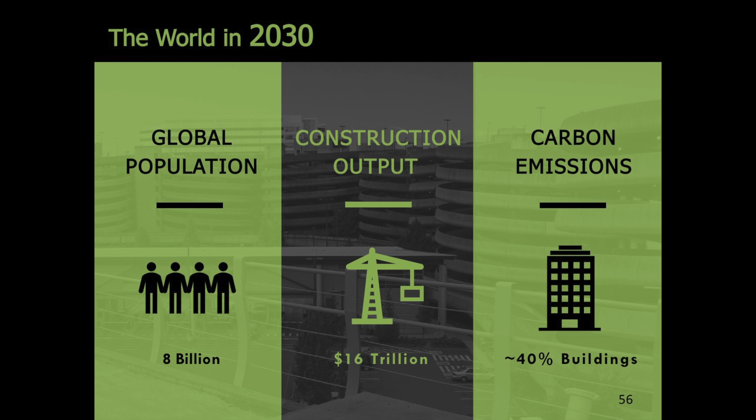By 2030, 60% of 8 billion people will reside in urban centers, requiring $16 trillion in construction output. This construction and operations of buildings will contribute to over 40% of total carbon emissions. We are here tonight to understand how to reduce carbon emissions from new construction by helping decision makers better understand how to account for carbon in their new construction projects.

This slide shows the two types of carbon emissions with the example of a building which is in the middle of the diagram. On the left are emissions associated with the building's operation and maintenance, such as lighting and heating. These are known as operational carbon. On the right are emissions associated with building materials, such as steel and concrete. These are known as embedded carbon.

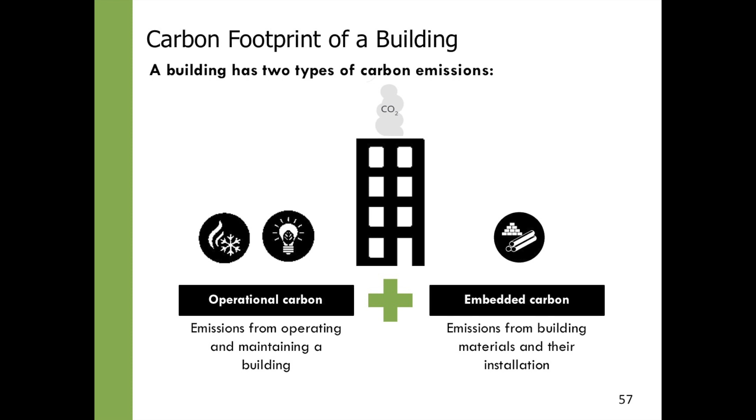Our client, the Port of Seattle, is interested in understanding the feasibility of measuring embedded carbon in their new and upcoming construction projects. The Port of Seattle has maritime and aviation operations in King County, Washington, and they own and operate the Seattle-Tacoma International Airport, SeaTac for short. Guided by environmental stewardship and strong sustainability goals, they wish to transition SeaTac into one of North America's greenest and most energy-efficient airports. For this, they created the Sustainable Airport Master Plan to guide the development of 30 new capital projects that will accommodate over 66 million people by 2034.

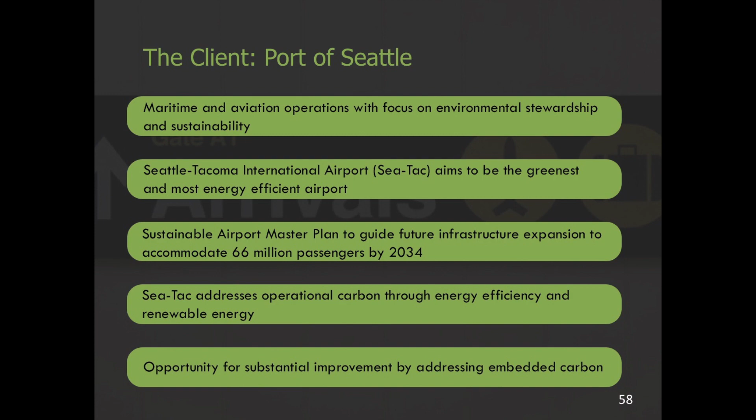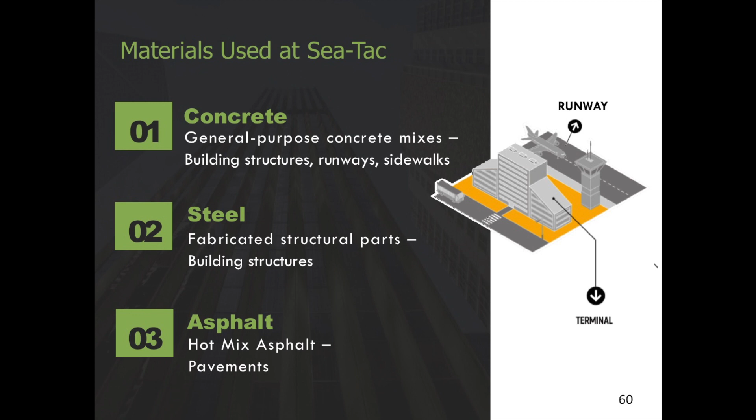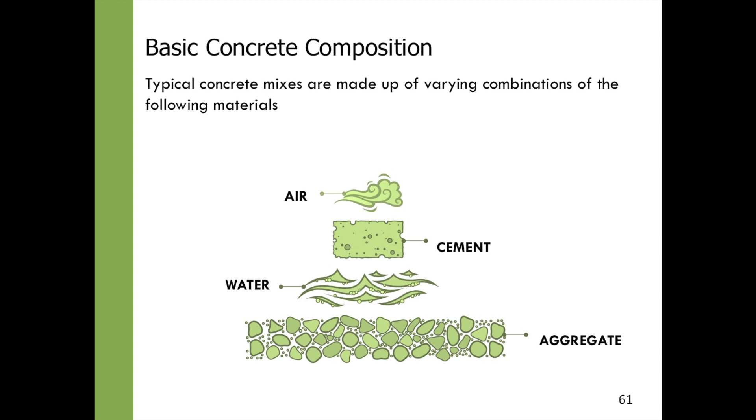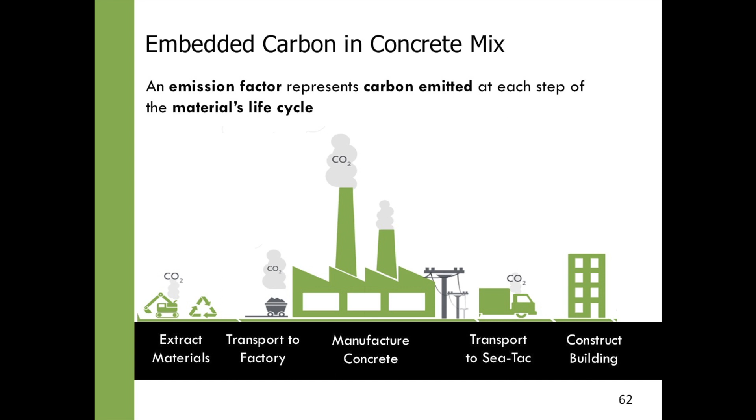To illustrate our approach, we look at the example of concrete. Concrete is made up of 4 components: air, cement, water, and aggregates that include sand and stone. This diagram here shows a typical life cycle associated with concrete. It has 4 steps, starting from material extraction to transportation to manufacturing and finally installation. So each component of concrete goes through this life cycle, emitting a certain amount of carbon at each step. The value that represents the amount of carbon emitted is known as an emission factor. An emission factor is important because it is an industry benchmark used to compare the carbon emission from materials from different manufacturers. Emission factors such as these are widely documented in Environmental Product Declarations, EPDs for short.

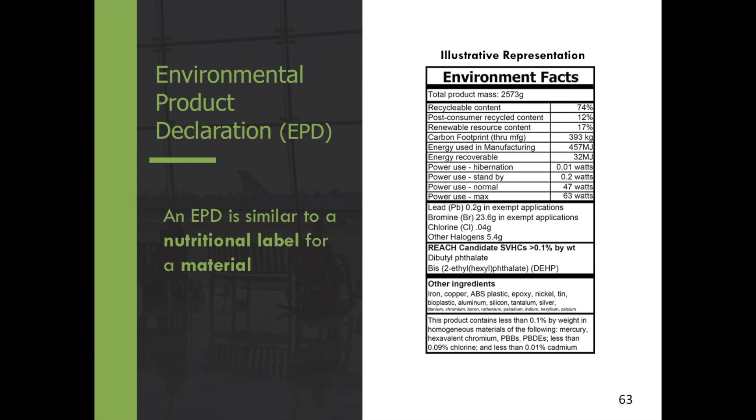Now, an EPD is like a nutritional label for a material, stating what the material is made of and the corresponding carbon emissions. All EPDs are verified by third-party certifiers. This diagram here is not an actual EPD, but a graphical representation to help us visualize the components and contents of an EPD. EPDs are issued by the respective material manufacturers, and they are the most extensively cited sources used in other emission factor sources such as generic databases and research reports. This is why we base the bulk of our research on emission factors available in EPDs.

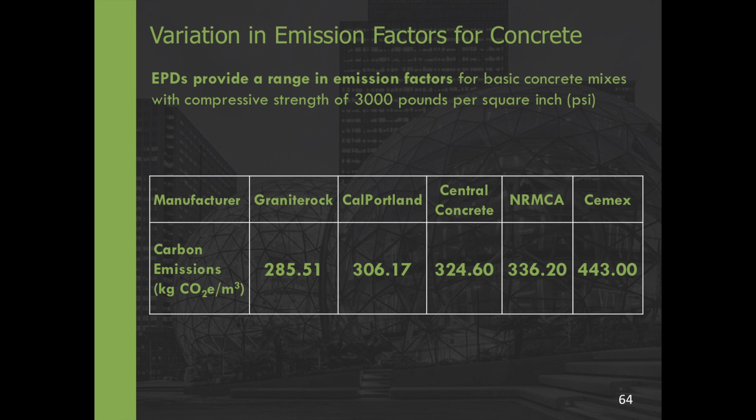Our client is aware that such variations exist, but they then wanted to know if these emission factors can be used to accurately measure embedded carbon. Specifically, they wanted to understand the reason behind these variations. Our research brought up two major reasons for this variation. The first reason for variation is using data from different sources such as EPDs, generic databases, and research reports. This leads to three issues in data quality: the inaccuracy and unreliability of data, the assumptions and proxies used, and the different calculation methods used.

The second reason for variation comes from the different processes used in a material's life cycle. One example seen here is that the same type of concrete can be manufactured using either a renewable source of energy or a non-renewable source of energy. Hence, depending on the energy mix used, the emission factor for concrete will vary.

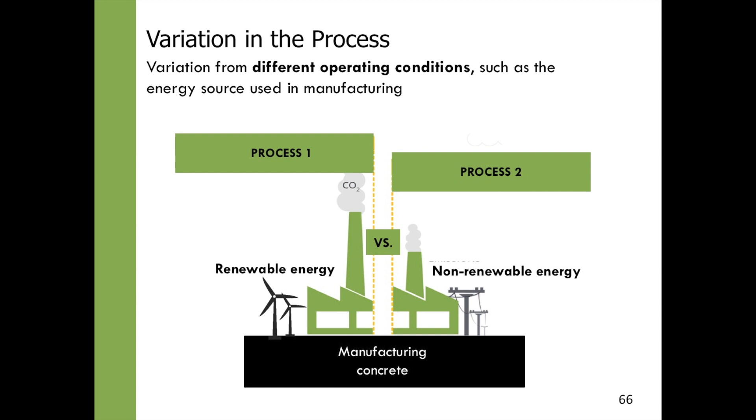Further, our research analyzed the top contributors to emission factor variation across all three materials that we studied. Concrete has an emission factor range of 286 to 443 kilograms CO2e per cubic meter concrete, primarily due to the type of kiln used in manufacturing, and second is the amount of cement used, because cement is one of the most energy intensive components in concrete.

Steel too has an emission factor range of 1,160 to 2,390 kilograms CO2e per cubic meter steel, mainly because of the technology used in manufacturing and the total energy mix used. Asphalt too has an emission factor range from 25 to 64 kilograms CO2e per ton asphalt, mainly due to the manufacturing process, that is, the type of dryer used in manufacturing, as well as the manufacturing temperature that produces either hot mix or warm mix asphalt.

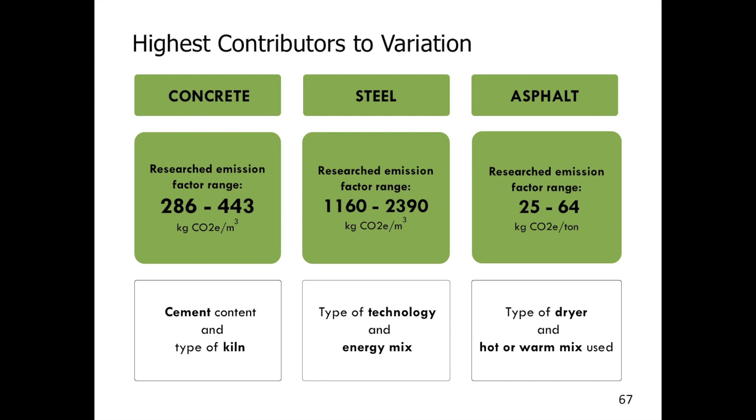Overall, the objective of our research was to evaluate the transparency and comparability of emission factors that could be used to accurately measure embedded carbon. A significant difficulty that we faced was the lack of documented data available for the sources used and the calculation methods used. For example, a previously noted EPD provides the emission factor for concrete to be 286 kilograms CO2e per cubic meter concrete. Now this number is only the tip of the information required to accurately measure embedded carbon.

Ideally, an EPD should have additional information, such as first, a detailed breakdown of the components used across the processes of a material's life cycle. Second, explain the data sources used as well as the reason for selecting them. And third, outline the calculation methodology used as well as all assumptions used in the calculation. Also, EPDs are self-reported, therefore they must guard against bias. This is especially true since there is no one standard for creating EPDs.

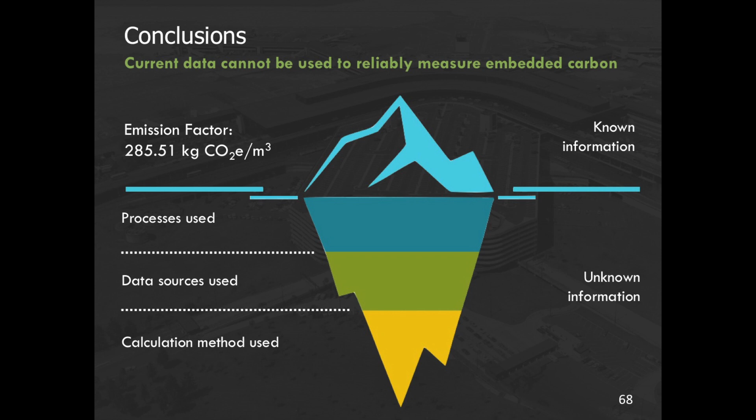Based on this background, EPDs are not a reliable source for emission factors, and hence we conclude that the current state of data available cannot be used by the Port of Seattle to accurately measure embedded carbon in their upcoming construction projects. To remedy this situation, we presented them two actions to increase and improve the data that is available. First is to take a legislative approach by involving stakeholders at the local and state level, as well as collaborating with industry organizations such as the US Green Building Council and other highly sustainable airports such as the Boston Logan International Airport, and they could come together to create a standardized process for publishing EPDs.

The second action would require that they use their purchasing power to motivate manufacturers to provide higher quality data. And this can be facilitated by creating a standardized data rating system that would assess the quality of data provided and rank it on a qualitative scale of excellent to poor. We believe that with these two actions, we will create a uniting force to put forward the case of measuring embedded carbon. With this, we're super excited to present our findings to our client.

Thank you for your time, and open for questions now. Okay, questions for Shruti, please. Raise your hands.

Amongst the different manufacturers that you presented there, since one of your variations is concentration of cement in the mix, did any of them have varying reputations for quality of their product? Yes, so we based our research on EPDs, and so we looked at only information available in them. So we do not have any data ratings currently in place that would give us the quality of the numbers that they provide with the data and EPDs. And this was one of the main difficulties that we faced.